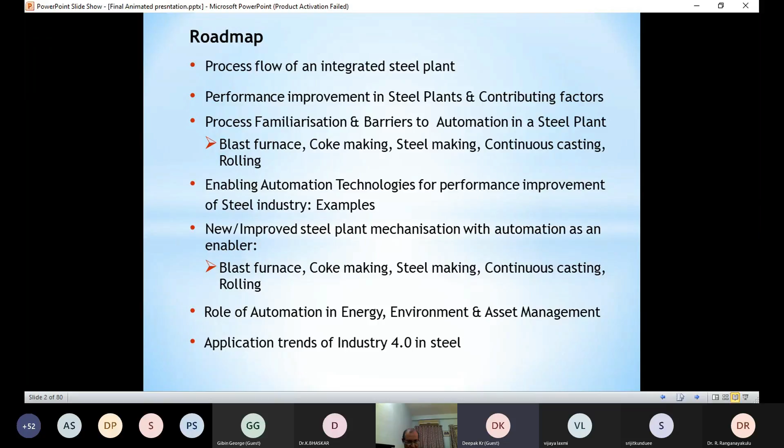Then enabling automation technologies for performance improvement of the steel industry - there will be 3 examples. The new and improved steel plant mechanization with automation as an enabler, how new technologies have changed automation and the affected process itself. Then again we will take the same examples of key processes: blast furnace, coke making. The role of automation in energy, environment, and asset management, and automation trends, Industry 4.0.

Iron was discovered in 2000 BC, and the first cast iron product was in 800-700 BC in China. Cast steel was first produced in India in 500 AD, but the technology was lost subsequently. The Iron Age started between 1500 to 1800 BC. This is a significant figure.

World annual steel production in 2020 was 1700 million tons, and this figure is more than all other metals put together. So steel is the majority if you talk about metal. China ranks #1 in the world with around 1000 million tons, and India produced 130 million tons in 2020.

Process flow of an integrated steel plant: if you look at an integrated steel plant from outside, the most important process where raw material is converted into liquid iron is the blast furnace. So the blast furnace is the most important process in any integrated steel plant.

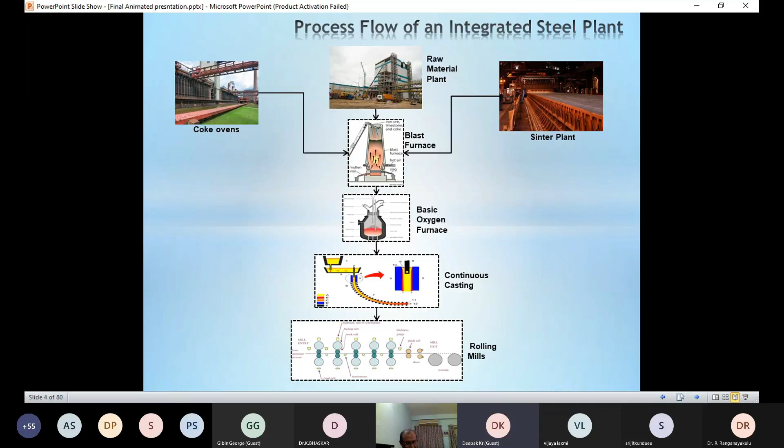These slabs, blooms, or billets, the output of continuous casting, are brought to rolling mills and hot rolled into various shapes. It can be flat or long, say rail or structural. After hot rolling, it can be sent to cold rolling for further thinning based on the application, and again processed into sheets, GP sheets, GC sheets, that kind of thing.

The steel plant process flow can be broadly divided into two categories: chemical processes, mainly blast furnace, coke making, primary steel making, secondary steel making; and physical processes that work on steel, that is continuous casting, rolling, and finishing. Here no chemical process is done, it is kind of shaping, rolling, and forming. Physical processes are visible and progress can be observed directly, and therefore may be controlled more easily.

Chemical processes - reactions take place inside a container under pressure, at high temperature, etc. Direct observation is not possible. Take, for example, the blast furnace - we depend on indirect observations, particularly the status of the output.

Processes up to steel making lag behind in terms of measurement of parameters and their controllability compared to, say, the rolling process. In the rolling process you can see things changing - the process is very much visible. Speed is very high, but you can control it. More precision is required.

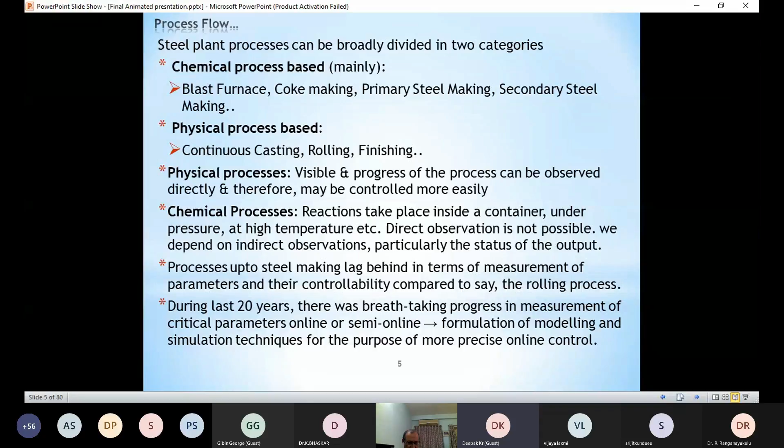During the last 20 years, there was breathtaking progress in measurement.

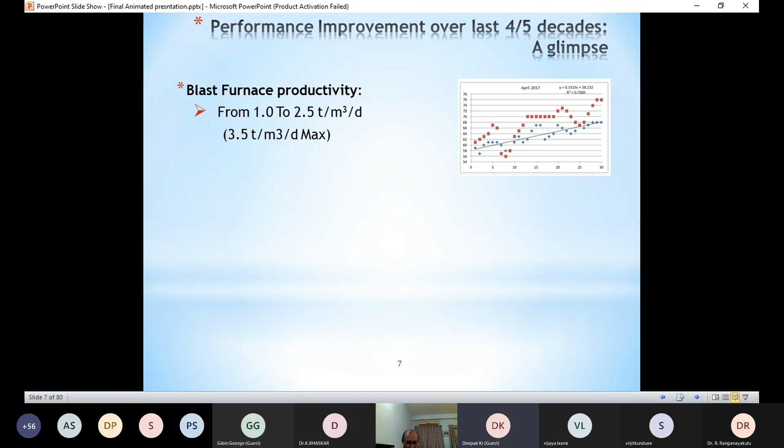Okay. The last line is being covered from that toolbar. I am not able to proceed. So there will be difficulty. No problem. If you go through...

If you go through the process improvement in the last 4-5 decades, blast furnace productivity went from 1 ton per meter cube per day to 2.5 tons per meter cube per day. This is the kind of productivity improvement that blast furnace has seen, and the maximum reported is 3.5 tons per meter cube per day. In India, it is normally 1 to 2.5.

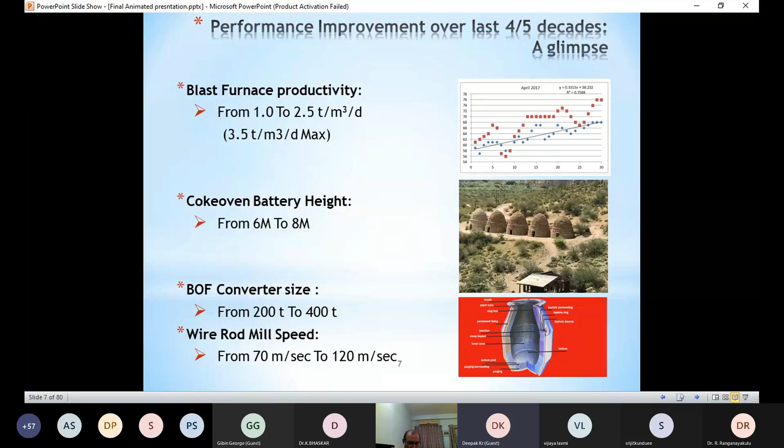Coke oven battery height went from 6 meters to 8 meters - this has gone up. BOF converter size, where liquid iron is converted to steel, has gone up from 200 tons to 400 tons. Wire rod mill speed has gone up from 70 meters per second to a huge 120 meters per second. Just think of a process where material is moving at 120 meters per second and you have to control it.

These are the contributing factors for performance improvement. It's not only electrical or automation, but there have been several breakthrough innovations in core technologies of steel production - metallurgical, mechanical (where rolling etc. comes into picture), electrical, chemical, civil, and allied.

But in particular, we have seen that electrical engineering and IT have contributed very significantly. Alongside that, developments in modeling and simulation of mechanical, chemical, and metallurgical processes have been unprecedented.

Innovations in mechanization and automation have leapfrogged mainly due to demands for better productivity, requirement of stringent quality, consistency, and high reliability. Automation and IT have ensured an enhanced level of process control without the involvement of operators. Because of automation, the number of people involved in the steel industry for making the same ton of steel has drastically gone down. As far as possible, processes are made semi-auto or auto, manless operator.

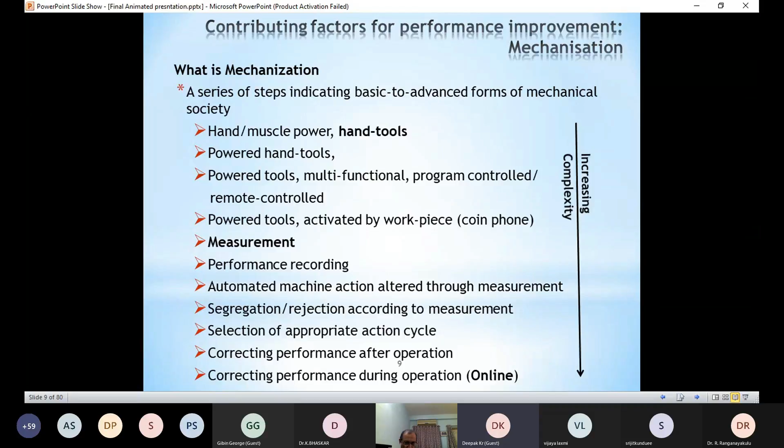What is mechanization? Mechanization is a series of steps indicating basic to advanced forms of a mechanical society. As we go from hand muscle power, hand tools, power hand tools, to power tools activated by workpiece measurement, then performance recording, automated machine action altered through measurement, segregation rejection according to measurement, and selection of appropriate action cycles, correcting performance during operation - as measurement and control take over, the complexity goes on increasing, but then control over process keeps on increasing. This is how mechanization has developed over time.

Use of machines, either wholly or in part, to replace human or animal labor is mechanization. Mechanization requires human participation to provide information or instruction. After 1900, factories were electrified and electric motors and controls were used to perform more complicated mechanical operations. This resulted in proliferation of mechanized processes to manufacture almost all goods.

In terms of efficiency, you can see for labourers it is 1 to 5.5%, whereas for IC engines it is 20% to 50%, and for electric motors it is above 90%.

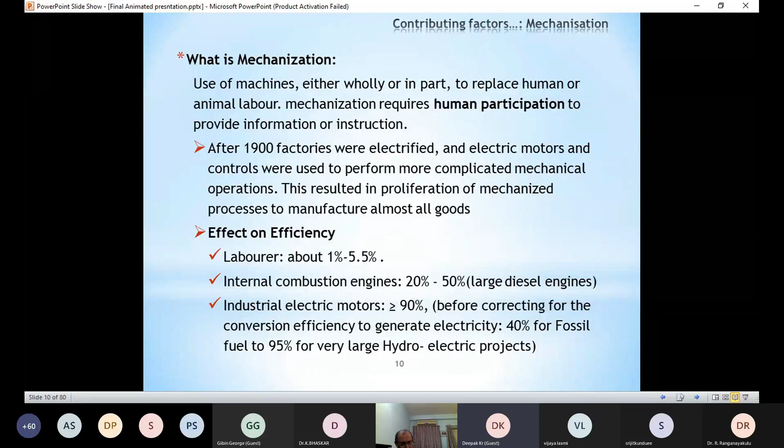What is automation? A wide range of technologies that reduce human intervention in a process. Automation has been achieved by various means, including mechanical, hydraulic, pneumatic, electrical, electronic devices, and computers. The paradox of automation is that the more efficient the automated system, the more significant is the human contribution.

Different types of traditional automation tools that we use are single loop controllers, PCS, PLC, instrumentation, motion control devices, DCS, HMI, and recently, not very recently but from quite a long time, AI, ANN, and RPA. A new field which is a subset of AI, cognitive automation, is an emerging field, and we hope that Industry 5.0 will be based on this only.

Automation of clerical tasks and workflows relies on natural language processing, real-time computing, machine learning, big data analytics, and evidence-based learning. The term automation has come into wide use since 1947, when Ford Motors established an automation department.

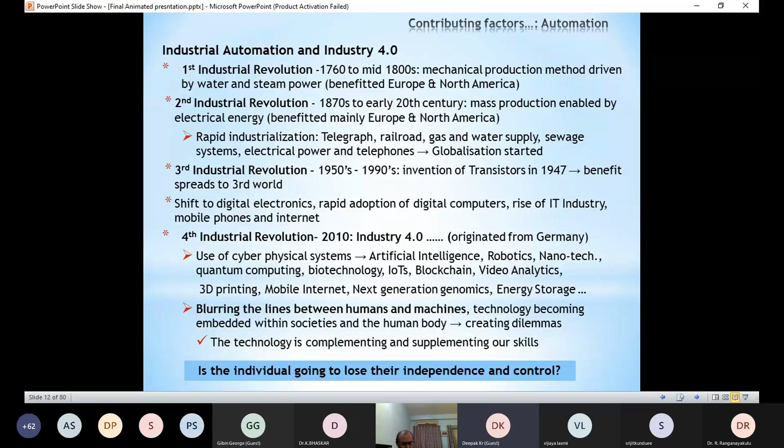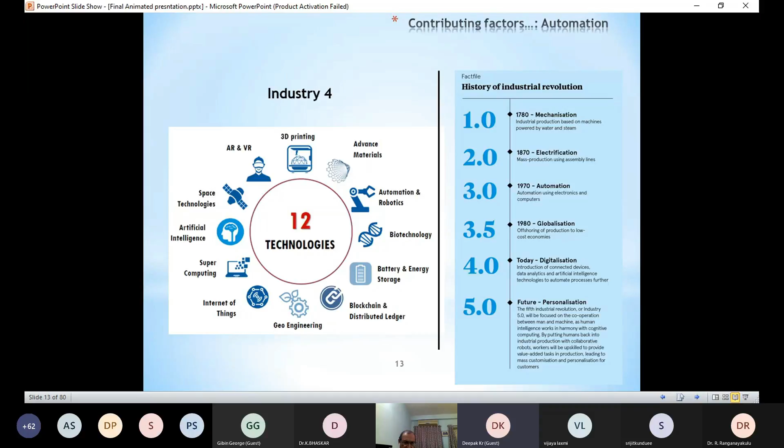This slide shows main technologies of Industry 4.0: 3D printing, AR and VR, space technology, artificial intelligence, supercomputing, Internet of Things, blockchain, and distributed ledger. Recently, Tata Steel has done something on blockchain with HSBC.

Now, process familiarization and barriers to automation in steel plants. So why is automation so difficult in a steel plant? We will take examples one by one.

There are many black box processes. The process cannot be visualized by human senses, if visible only from a distance. Automation equipment is exposed to high temperature. General ambient temperature is 5 to 10 degrees centigrade higher than the normal environment temperature, and it is dusty, so reliable operation is an issue. Equipment outside the control room requires mechanical protection against ingress of foreign material and vapor, so we have to see IP ratings for all automation elements that we employ.

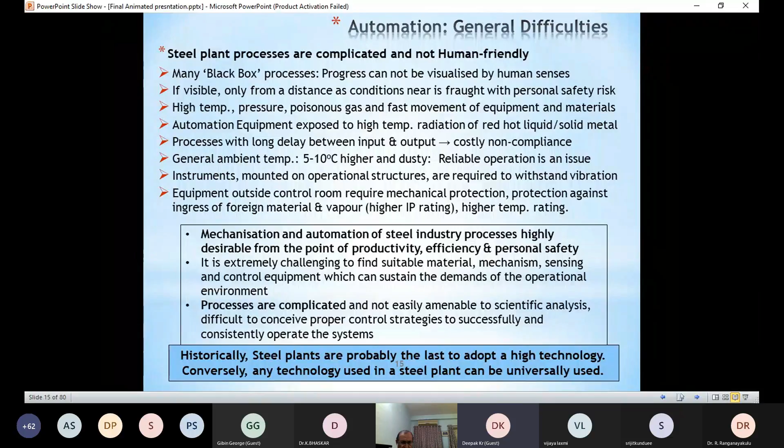Next, sir. Talking about blast furnace, as I said, the inputs are iron ore and sinter plant. It is about 60 meters tall, and the output is hot metal, also called pig iron. Here carbon is about 4%, and this requires extensive infrastructure, because in blast furnace we have several inputs, and all those are big plants.

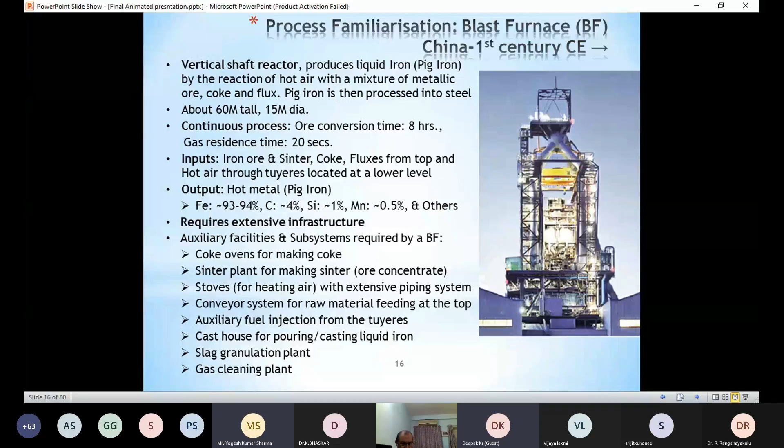Coke ovens for making coke, sinter plant for making sinter, stoves that are used for heating air and fed to blast furnace from down below, conveyor systems for raw material handling, gas cleaning plant, etc.

So it's a multivariate process subject to inter-influencing variables. Complex chemical reactions take place at high temperature, around 2300 centigrade, and pressure 1.5 to 2.5 atmosphere, progressing both vertically downwards and radially outwards at different levels differently.

So there are several parameters that need to be monitored for proper, efficient functioning of the blast furnace: temperature and pressure distribution vertically, temperature and pressure distribution radially, burden height, etc. The challenges are reliable sensors and instruments to operate in such hostile ambient conditions. Proper installation and maintenance are key.

Next, sir. Another input to blast furnace is coke oven, a product from coke oven, that is carbonized coal. This is a thermal distillation process. Coking coal is heated above 600 degrees centigrade in the absence of oxygen, and the volatile components evaporate, leaving behind hydrocarbons. So coke oven gas is used as a fuel in downstream steel making process.

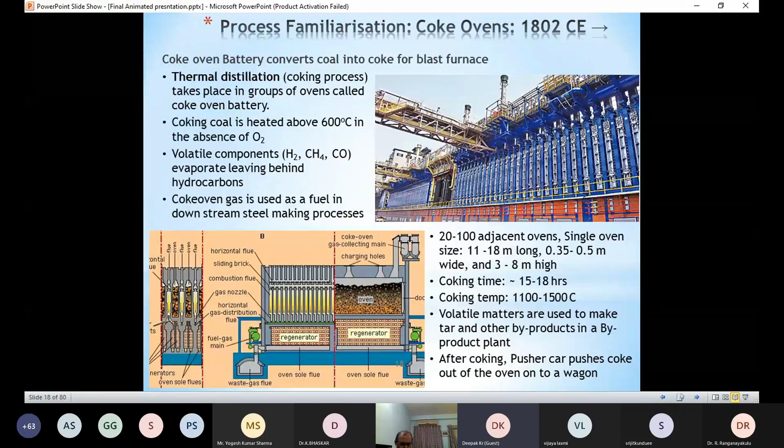So you can think of the kind of operation and infrastructure that is required here, and proportionally we need rugged automation systems.

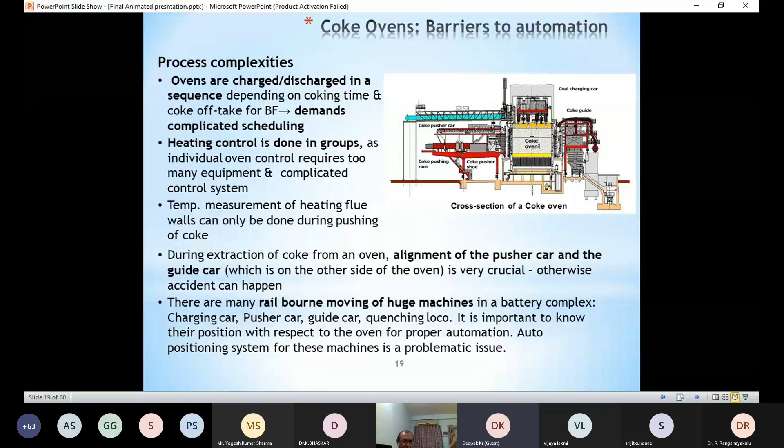Now what are the barriers? Ovens are charged and discharged in a sequence depending on coking time and coke offtake for blast furnace. This demands complicated scheduling for when you will charge and when you will take out, so that there is no deficiency of material in blast furnace.

Heating control is done in groups. Temperature measurement of heating flue walls can only be done during pushing of coke, but you have to monitor the process continuously. During extraction of coke from an oven, alignment of the pusher car and the guide car is needed—when you are pushing, the guide car on the other side of the oven has to be aligned. So you have to have some automation alignment system for this.

There are so many complex operations in this hostile environment, and automation along with alignment, scheduling, and proper instrumentation for heat and pressure should work 24/7.

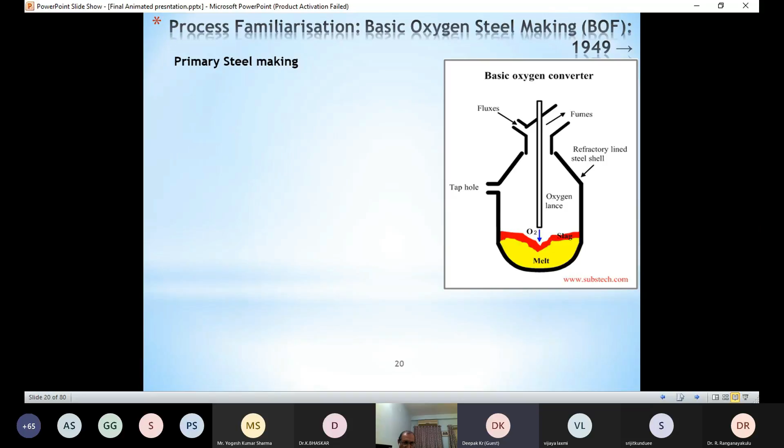The next process is primary steel making, where iron is converted into steel. Carbon-rich molten iron is made into steel by blowing oxygen through a lance at supersonic speed. The converter vessel is then tilted to tap low carbon steel into a ladle for secondary processing.

This further fine-tunes the chemistry. The BOF process eliminated the very long duration open hearth process. Now the converter takes a charge of up to 400 tons and completes the process in 40 minutes. This used to take 10 to 12 hours in an open hearth furnace, but that open hearth technology is quite old now.

There is combined blowing here, oxygen blown from the top and inert gas from the bottom. This requires a special facility.

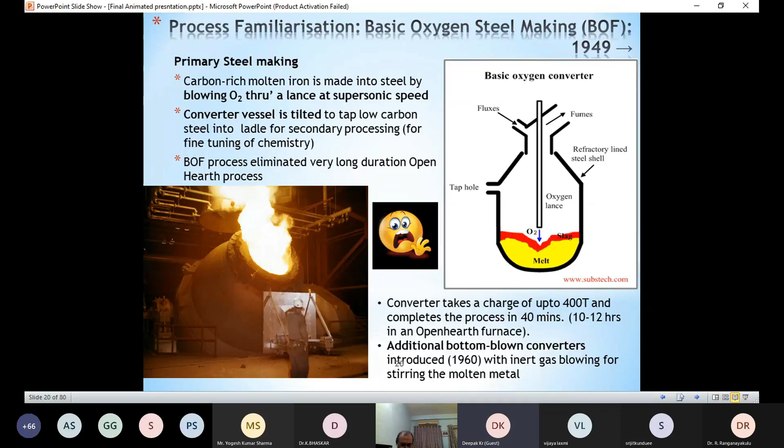There are more than 3,500 different grades of steel for various applications, based on chemistry, physical properties, etc. The purpose of secondary steel making is to produce better quality, various grades of steel.

Deoxidation is done, which is removal of oxygen by a killing process. Alloying is where you add alloying elements to obtain diverse properties. Then there is microcleanness, removal of non-metallic inclusions to improve the microstructure of the steel. This secondary steel making process comes after primary steel making, and it is meant to improve quality and make various grades.

This is a very precise process where vacuum is created in a ladle furnace, and oxygen removal and other difficult processes are done to further clean the steel or make newer grades. This requires huge automation systems and precise electronic automation systems.

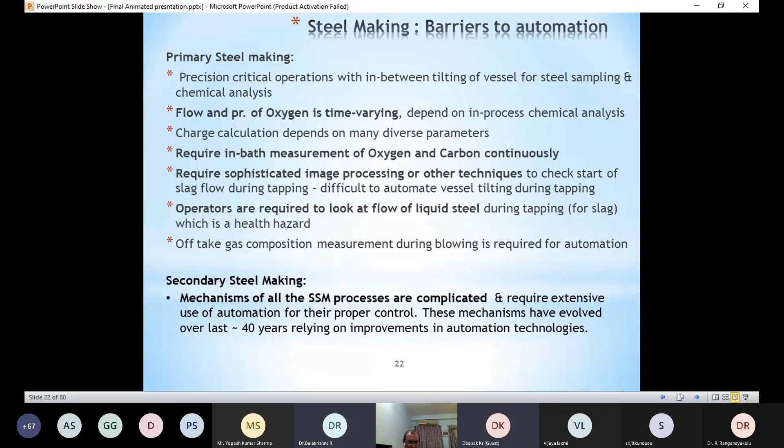Offtake gas composition measurement during blowing is required for automation. It's almost the same for secondary steel making, but more precise.

Now, continuous casting. In this process, molten steel is solidified while moving into billet, bloom, or slab form, which has totally eliminated the process of ingot casting. Earlier there used to be ingot casting from molten steel.

Now it is solidified in a continuous caster directly into billets, bloom, or slab. Molten steel flows from the ladle to the tundish to the water-cooled mold. The molten steel solidifies against the water-cooled copper mold walls to form a solid shell. Drive rolls continuously withdraw the shell from the mold. Below the mold exit, the solidifying steel shell acts as a container to support the remaining liquid steel.

The liquid steel, as you can see in the figure, comes down to almost a horizontal level. The solidified strand is torch cut into slabs, blooms, and billets. This is done online. This is a typical slab caster with a casting speed of 1.4 meters per minute.

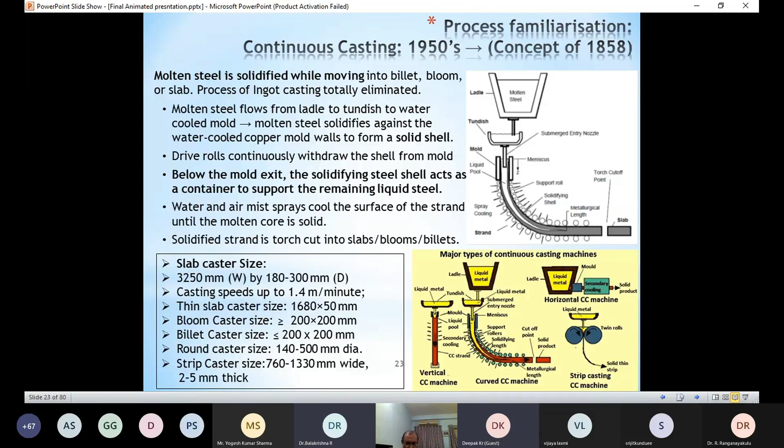There are several types of caster machines.

Now, barriers to automation for this continuous caster. Initially it was not that demanding, but modern casting machines can produce a wide variety of shapes and cross sections with automation. The tundish is the second component from the top, shown in yellow.

Continuous temperature measurement requires special refractory-coated probes, which are dipped inside hot metal at 1600 degrees centigrade. So you have to take the temperature of hot metal at 1600 degrees centigrade, and that too continuously.

Dissolved hydrogen and O2 concentration measurement in liquid steel is needed. Hot metal level measurement is very complex, so we employ electromagnetic level measurement. Then there is flux thickness measurement, which is again a very complicated thing.

Mold level measurement used to be an area of concern, but now we have radioactive level measurement systems. Liquid steel flow estimation was not possible earlier; now we have ultrasound Doppler velocimetry.

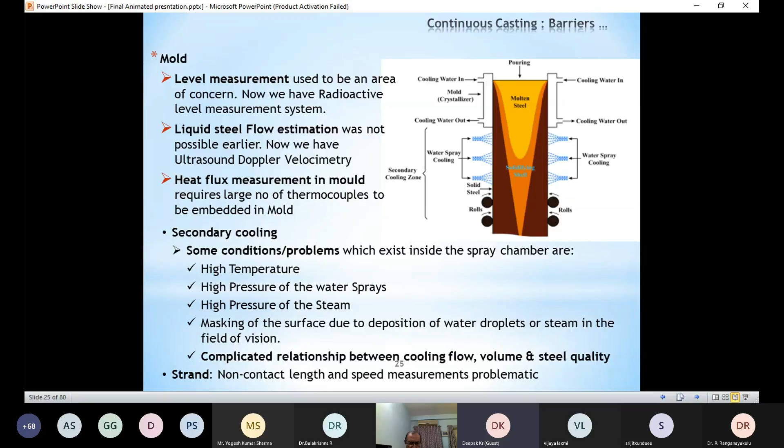Talking about rolling after continuous casting, when it takes a shape - bloom, billet, or slab - it is brought to rolling. The invention of rolling dates back to drawings of Leonardo da Vinci, as you can see in the figure. This is a metal deformation process where the material is pressed between two oppositely rotating rollers to reduce thickness. The roll stand holds the pairs of rolls together, so there is a rolling stand in between. For simplicity, there is a pair of rolls - thick metal comes in, and thinner metal goes out after rolling.

There are two kinds of rolling: hot rolling and cold rolling. Hot rolling temperature is above recrystallization temperature. This produces more tonnage than any other manufacturing process. The main products of hot rolling are shapes, bars, rods, rails, sections, flat, hot strip, and skelp.

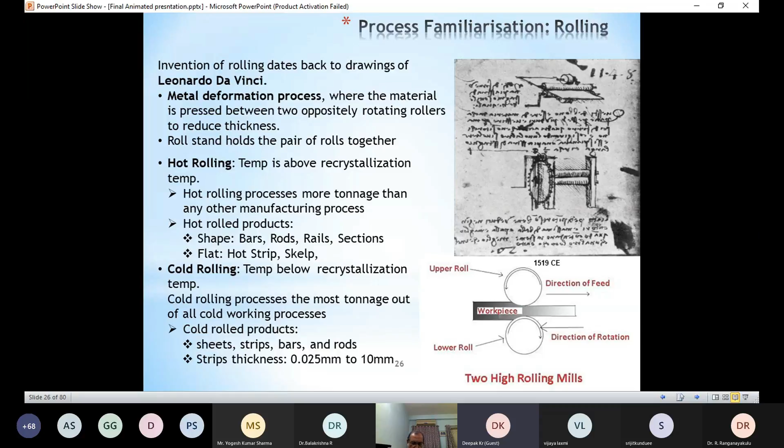Cold rolling temperature is below recrystallization temperature, so it is normally at environment temperature only. Cold rolling processes the most tonnage out of all cold working processes. Cold rolling products are mainly strips and sheets, with thickness as low as 0.025 mm as the minimum.

The hot rolling process is visible but extremely fast. The slab or bloom is first brought to a reheating furnace, where it is heated and soaked, then brought to hot rolling mills which have several stands - you can see 1, 2, 3, 4, 5 stands here. Each stand reduces it by some percentage.

Since the material is at very high temperature, say above 1100 degrees centigrade, the process is visible but extremely fast. The environment is hostile - temperature is high, there is a lot of vapor, dust, and EMI. The inter-stand space is very small, but many sensors are required to be placed there. Instruments mostly require massive protection and cooling, and must be protected against accidental contact with rolled material during operation.

Installations must account for moving of heavy equipment by cranes, and maintenance space for production systems. Cabling and cooling arrangements at the shop floor pose severe challenges. Sensor and actuator accuracy and repeatability are very highly important.

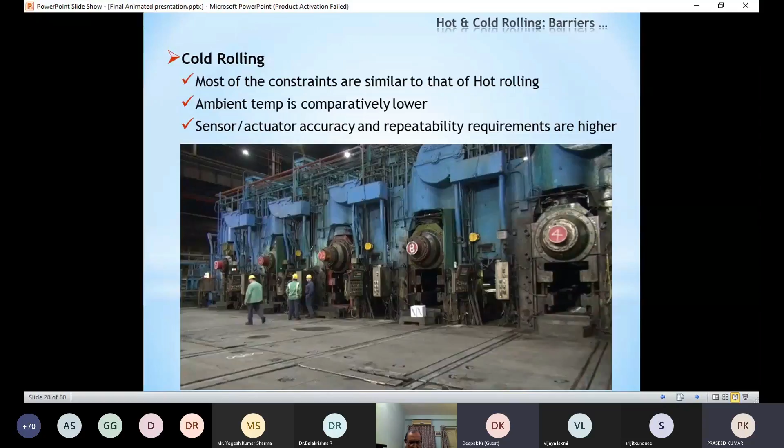The difficulties in rolling mill measurement involve several things to be measured: in motors, the torque, interstand tension, roll force, strip thickness, shape, width, edge position. In the reheat furnace, you have to measure and control temperature, pressure, flue gas composition, progress of heating, coil position on the roll table so it is tracked properly, and entry and exit temperatures are maintained.

The main controls available in rolling mills include automatic gauge and width control, hydraulic gap control, crown and profile control, crop optimization, and thermomechanical rolling.

There are several areas that need modeling and simulation in rolling mills: reheat furnace control, prediction of strip temperature - especially exit temperature, which is extremely important - roll wear prediction for finishing stands of hot strip mill, accelerated cooling of strip, since cooling matters a lot for properties, and crop optimization so that wastage is minimum.

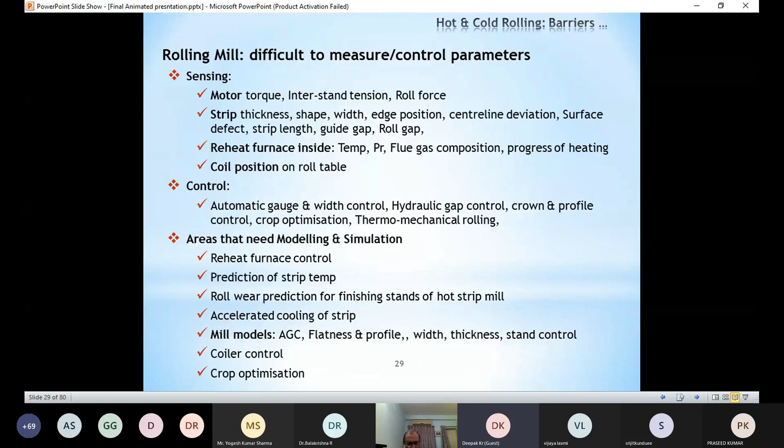Enabling automation technologies for performance improvement of the steel industry: the traditional automation system implies a hierarchical control system, with sensors and actuators at the bottom level, then controllers, motors, PLC controllers, DCS, single loop controllers, along with SCADA and HMI. Above that comes simulation and modeling, and even at the top of it, IT, and now digitalization and business process automation.

So the traditional elements of automation - sensors, controllers, fieldworks, SCADA, HMI, simulation modeling - now have new components: smart and new generation sensors and actuators, robotics, big data, manufacturing analytics, AI, cloud technology, AR and VR. These new things are making it exciting and offering a lot of opportunity.

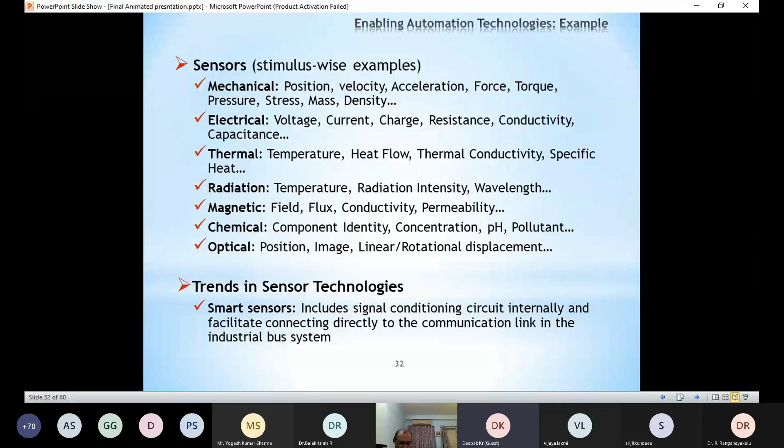Now sensors are changing a lot. The new generation of sensors are smart sensors that have signal conditioning circuitry internally and can actually have a communication link, and more sensors are being brought to the communication link.

Sensors with advanced technologies: piezoelectric transducers can be used to measure force, acceleration, pressure, and many other parameters. Proximity switches, tactile sensors, ultrasonic sensors, capacitive sensors. Some samples of specific sensors.

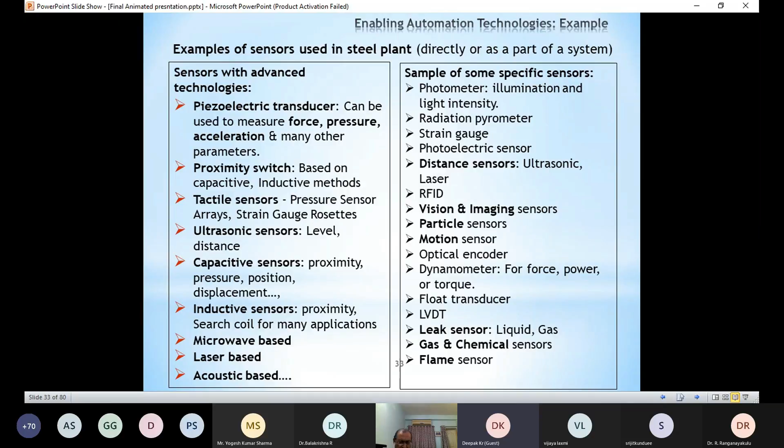Photometer, radiation pyrometer, strain gauges, photoelectric sensors, distance sensors, vision and imaging sensors, particle sensors, motion sensors. So there are several types of sensors directly being used in steel plants.

Now the trends in sensor technologies are mostly miniaturization. These have to be less power consuming, improved performance, multiple sensors with small footprints, digitalization - that is intelligence to interpret data - IoT capability, sensor fusion.

Now several sensors are being fused into one, for example pressure and temperature sensing. Tri-quad sensors is the trend, IoT compatibility, wireless connectivity. The growth areas for new sensor technologies are pressure, force, temperature, spectroscopy, acoustic - lab-based systems are going online.

Actuators are devices that operate something linear or rotary. So energy for movement comes from manual, mechanical, electrical, hydraulic, or pneumatic sources. New types of actuators have come into picture: thermal and magnetic actuators.

Shape memory alloys - in thermal type, heat produces movement. In magnetic types, field produces movement. There is a wide and powerful range of motions, and these are lightweight.

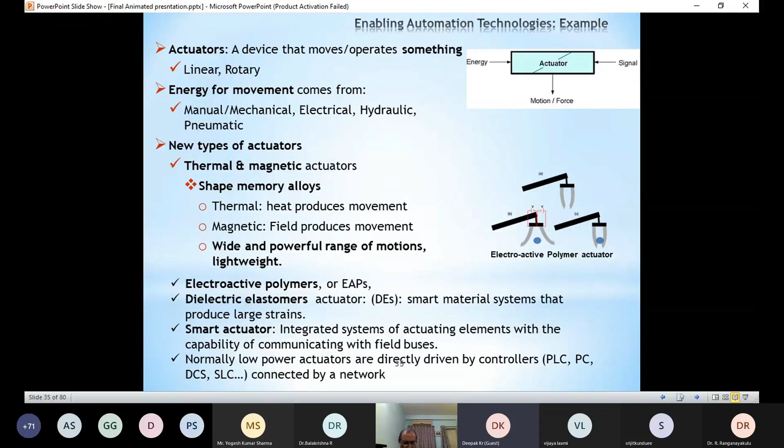Pneumatic actuators and hydraulic actuators are used a lot in the steel industry. Pneumatic actuators are essential for fire or ignition hazard applications.

These are better suited for higher force applications. Pneumatic diaphragm actuator, piston actuator, pneumatic rack and pinion actuator - various types. Hydraulics are mainly used for bending, lifting, pressing, and moving. These are for harsh operating environments, and these actuators are quite precise.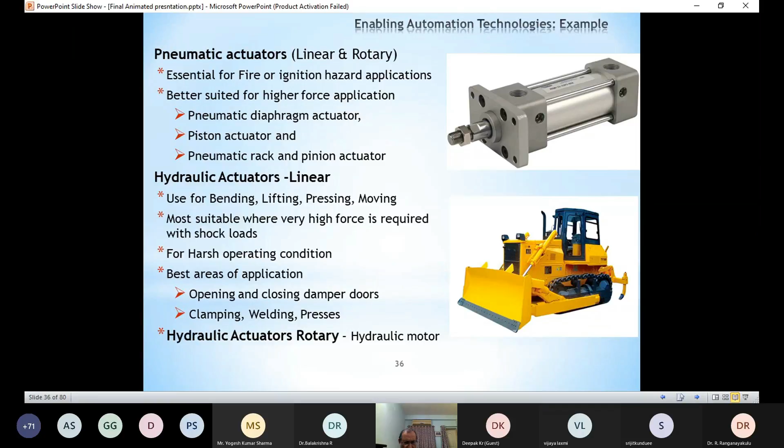Controllers, as we know, are the basic requirement for any control system. Single loop controllers, PLCs - there are several types of PLCs: small, compact for small applications where I/O requirement is less; modular PLCs that have a common bus and the I/O capabilities can be extensive, mid-size, or large size. So there are several types of PLCs based on application we select.

Now where is PLC going? PLC is going towards DCS, and DCS is going towards PLC. So there is merging of functionalities. The microcontroller is programmed, and more features are added. So merging of PLC and programmable automation controller functionality is the new trend.

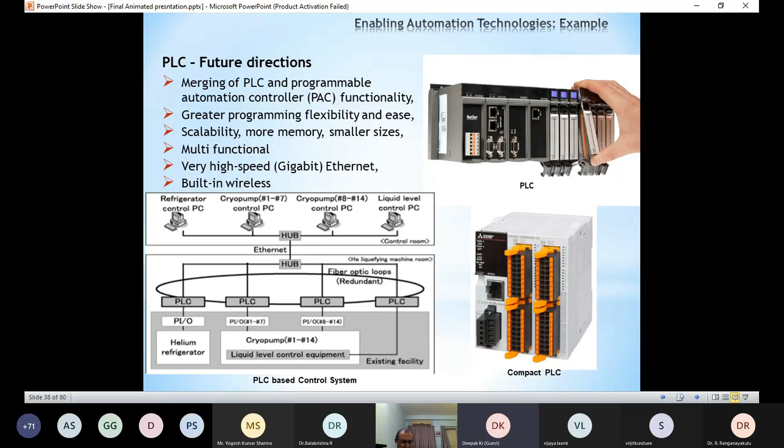There is greater programming flexibility and ease, scalability, more memory, smaller sizes, multifunctional, very high speed Ethernet, built-in wireless, web module. There are so many things - all the features that were available in any DCS controller are being brought to the PLC as advanced PLC or in some other name.

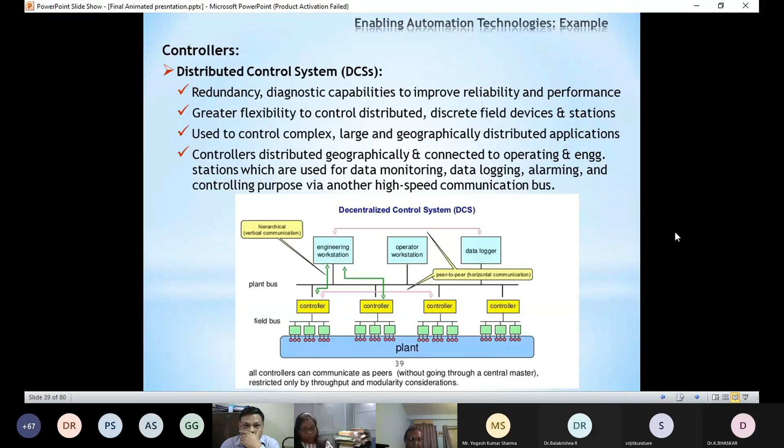I am not going into the details of DCS, it is too complicated to go into detail, but a general question comes up between PLC and DCS. Many of us, including automation engineers, are confused about whether to use a PLC or DCS - this is a common problem. So this is a simple comparison. It does not tell you what to use, but it tells you some comparison between PLC and DCS.

Application-wise, PLC is generally for dedicated applications, whereas DCS is for complex processes. Architecture-wise, PLC is simple and flexible. Speed of response for PLC is higher, as it is dedicated for a process, whereas DCS is much slower comparatively. Scan time for PLC is low. Control for PLC is for specific machines, whereas DCS is normally for a plant.

IOs are, let us say, to the tune of 1,000 numbers in PLC, whereas in DCS it would go into several thousand IOs. Controller type for PLC is centralized, whereas in DCS it is decentralized. Human interaction required is minimum in PLC, but in DCS we require comparatively more interaction because it is a diverse process. Flexibility-wise, PLC is less flexible. Programming-wise, PLC is freely programmable, whereas DCS has built-in control functions to be configured - once configured, it is easy to use. Redundancy-wise, additional hardware is required for PLC to bring in redundancy, whereas for DCS it is a default feature. Cost-wise, PLC is less.

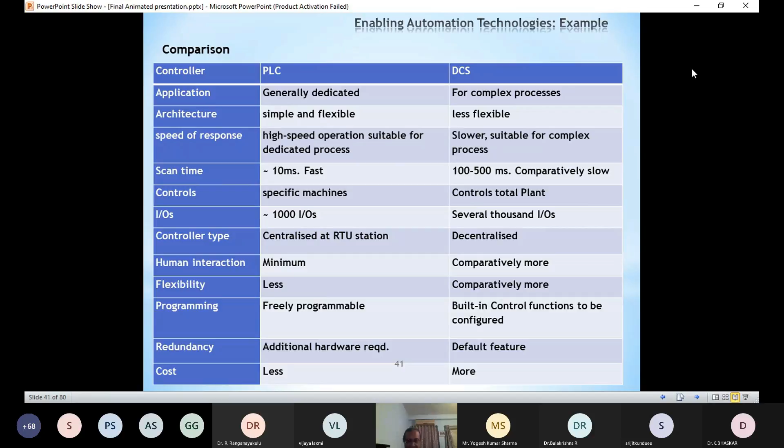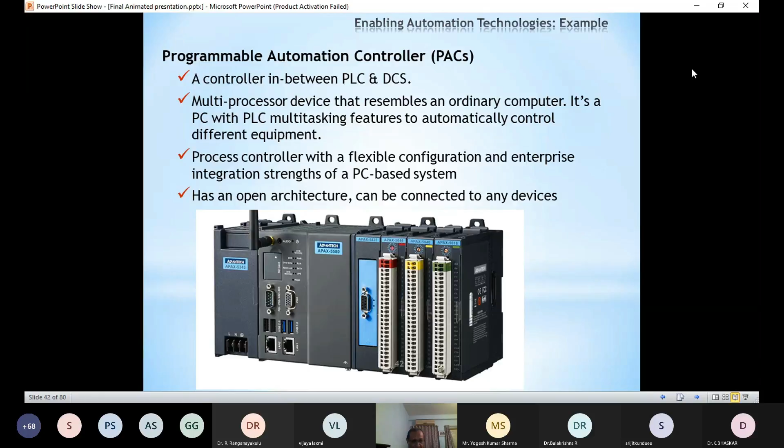Now, this is the programmable automation controller. You can say it is a controller in between PLC and DCS, or between PLC and PC - programmable or personal computer, whatever industrial grade personal computer. It is basically come up to do the job of both PLC and DCS, by some vendors. It basically resembles an ordinary computer. It has multitasking features, a flexible configuration, and an open architecture.

The term supervisory control and data acquisition, SCADA, is very widely used. This is a generic name, not an equipment. Supervisory control and data acquisition can basically be attained by many devices. Particularly, this term is used for processes which are spread over a very long distance, like transmission, power and distribution, transmission and distribution pipelines, power transmission. Then there are very geographically distributed processes where the data link is basically a shared data link, for example microwave, satellite, phone lines. These are the places where the term SCADA is generally used.

Now, let me come down to enabling automation technologies for performance improvement of steel plants. What I mean is those technologies which have enabled performance improvement in steel plants, but they are not specific to steel plants - they are used everywhere.

To start with, let us say modeling and simulation - this is a continuation, sorry, Deepak started, I forgot the overall title. Modeling and simulation is very, very important for any process today. For steel plants, earlier it was difficult to do, but now it is possible because of access to information inside a process. This is basically designing any conceptual system, conducting some experiment on the conceptual system, understanding the performance of the system, and then evaluating alternative management strategies and decision making to get the final results.

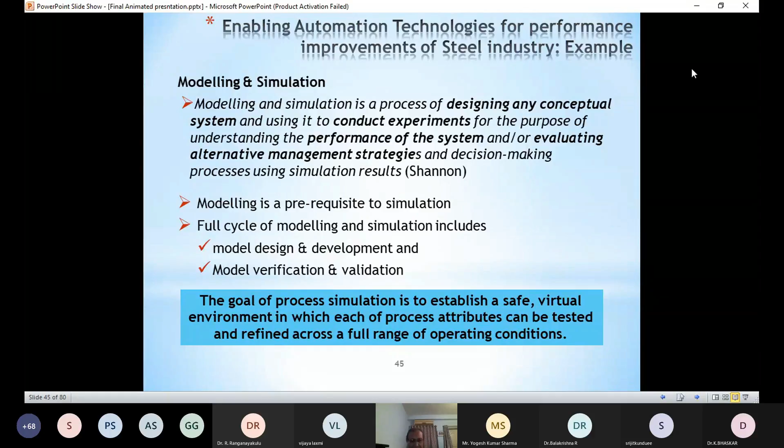Modeling is a prerequisite to simulation, and full cycle modeling includes model design and development, and then model verification and validation. The goal of process simulation is basically to establish a safe virtual environment in which each process attribute can be tested and refined across a full range of operating conditions without going into the actual operation. So it is basically safe - we are playing safe and trying to understand the dynamics of the process.

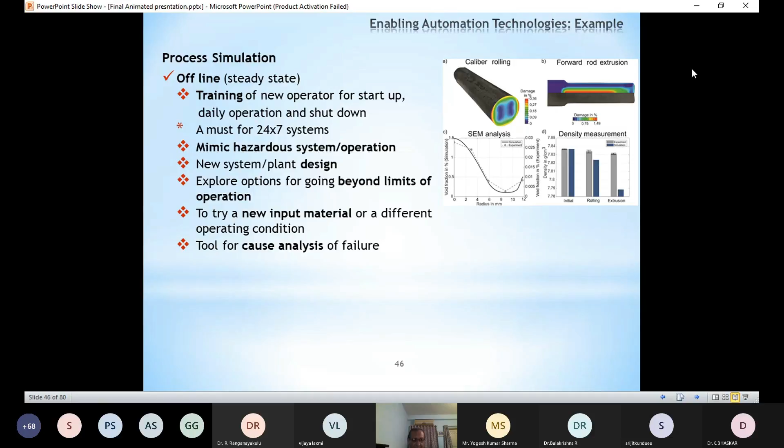Now, in process simulation, offline simulation has several purposes. Training is one of them - operator training. Then mimicking hazardous system operation is a very important requirement for process simulation. It is also used for system design, for exploring beyond-limit operation of any plant, and if you are changing raw material, offline simulation is an excellent tool to understand how the system will behave. It is also used for failure cause analysis.

Whereas real-time dynamic modeling and simulation runs along with the plant, it monitors and optimizes the plant performance continuously. It tracks performance, optimizes production, and improves plant controllability.

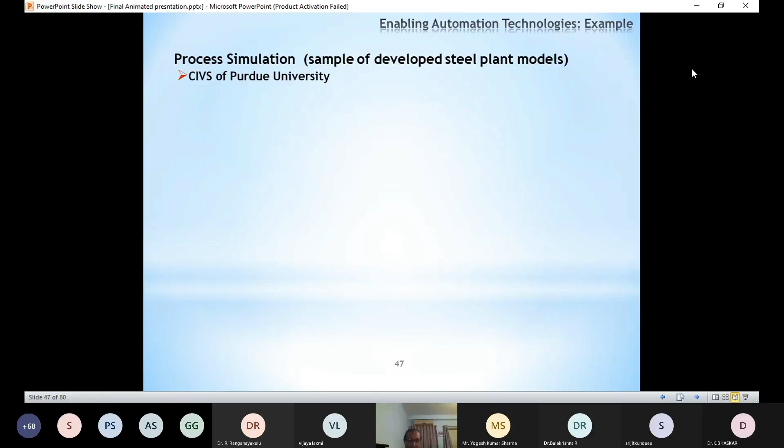Now, for steel plant modeling and simulation, there are many organizations all over the world who have mastered the various kinds of technologies. Purdue University for a very long period has been working on modeling and simulation for steel plants in particular. You can see this is a partial list, not a full list, of various models they have developed over a period of time.

Many of these models deal with blast furnace, which I consider the most difficult process among all steel making processes. They have used computerized fluid flow models in many places. They have also done modeling for training purposes, including safety training and operator training, and modeling for steel processes other than blast furnace. They have done finite element analysis as well, and many models are based on that.

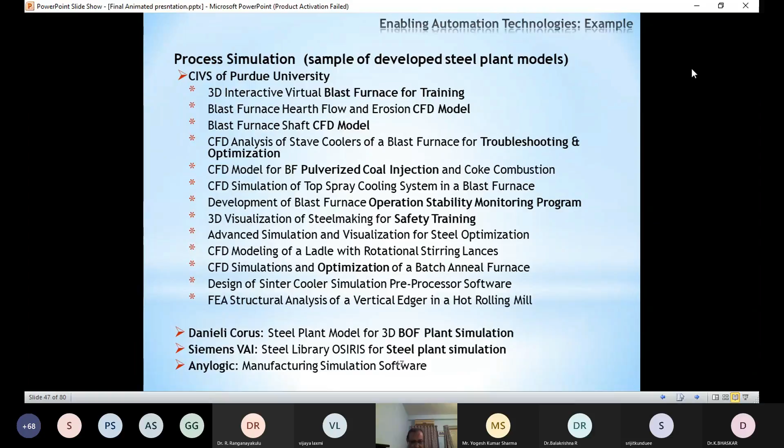There are companies like Danieli Corus, Siemens VAI, Anylogic, SMS, and ABB. There are many companies in the business of steel plant modeling and simulation, and here is a small list of them.

Modeling has two types of approach. One is called agent based simulation and modeling, ABS. This is a bottom up modeling architecture that focuses on modeling individual agents. It is a decentralized simulation architecture, and model inputs are often based on theories and subjective data, with the overall system response emerging from micro level relationships.

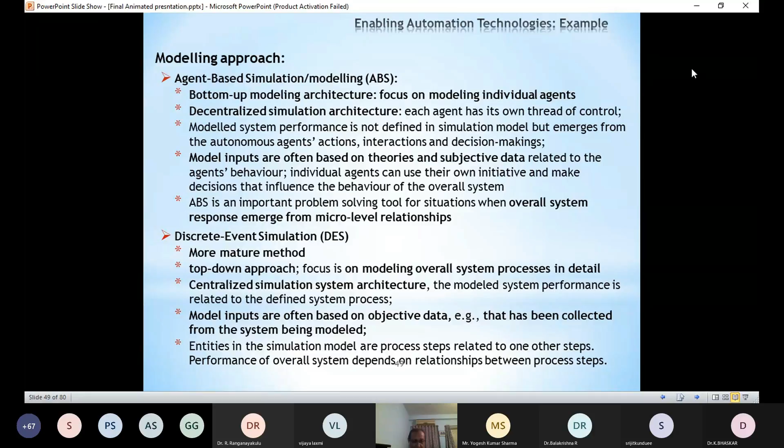The modeling procedure is this: we start with a problem statement and objectives, then do system analysis, model building, and coding. Then comes verification and validation. After that, we go for production runs and statistical analysis of data, and at the end, implementation.

Of these, verification and validation is the most important, which can be done in four ways. One is self-validation, where the model development team itself makes the decision about validity. Co-validation is where the validation process is integrated within the model development process itself. Independent validation is done by an independent third party, and scoring validation uses a scoring model for deciding the validity of the model.

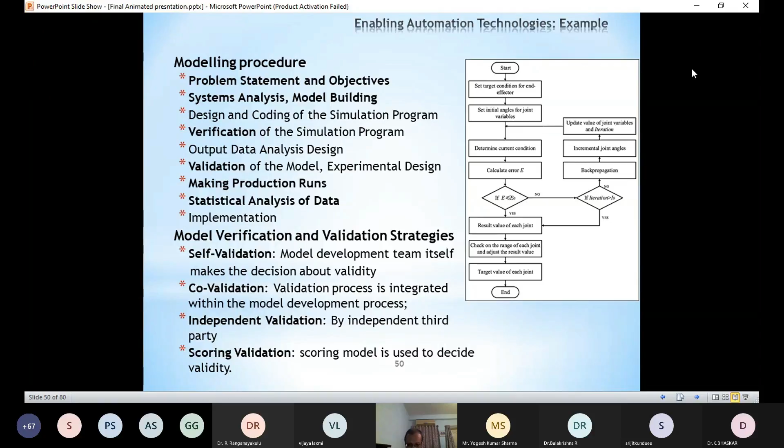Application of advanced automation technologies in basic manufacturing processes is a very recent trend in steel plants. Earlier, for example, we had instruments, but they were not smart, so we had to use a lot of additional equipment to understand their readings, modify them, and communicate them in physical terms. We now use smart instruments, which are integrated systems of sensing or actuation with communication facility and internal processing, including scaling and other functions done internally.

Signal conditioning circuits are also included. Human machine interface is a graphical representation of the process where an operator can sit and interact with system processes through input and output. They can control any process sitting in a room. You can see the screen of a DCS system in the right bottom corner.

Advances in robotics have many applications in steel plants, particularly in hazardous areas, and steel plants are full of hazardous areas. In fact, I would find very little place if I looked for a safe area in a steel plant.

AI, artificial intelligence and machine learning is picking up. These are new age automation tools, and they are being used in steel plants, not widely. It has been used by many steel plants in many applications, but not very widely as yet.

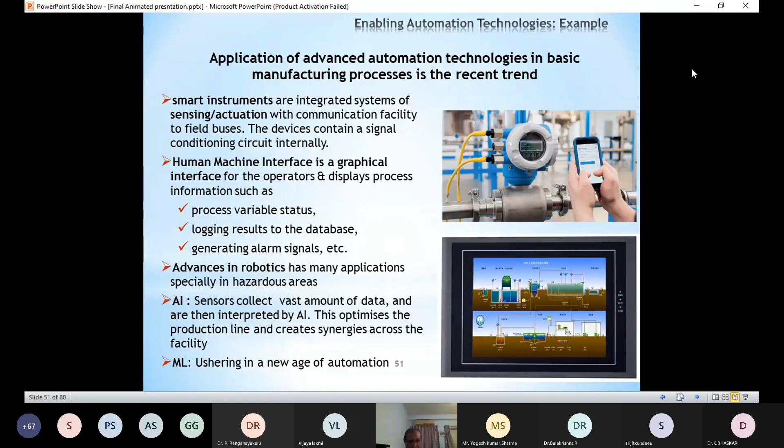IIoT, Industrial Internet of Things, is again a new enabler, automation enabler for steel plants. In real time, IIoT helps to adapt and change the overall operations. It generates a faster response in terms of actions. Decision making is faster by top management or any level of management for taking various decisions about the process in terms of business decisions, and it has great potential for quality control, supply chain traceability, etc.

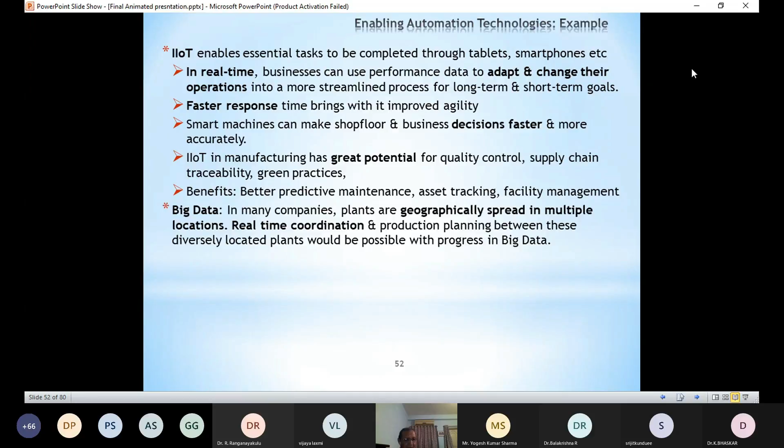Big data is an area which is very useful for steel plants. Steel plants are geographically spread in multiple locations. Like Steel Authority has about 10 plants spread all over India. Now, we are unable to coordinate on a day-to-day basis, frankly. After a few days we look at who has produced what, and then various decisions are taken. It is basically because the data transfer is not very fast. Big data and their analysis can lead to real-time coordination of various production processes, production planning processes, which are spread over a long geographical distance.

Robotic process automation is a very new tool where software is used basically to create and deploy software robots. I am not yet aware of any specific location in India where it is used, but I understand this is being used in various other plants all over the world, many places, advanced places.

Now, Industry 4.0, these are all Industry 4.0 tools. Industry 4.0 at the end for steel plant means autonomous steel work, as people, product and production facilities are fully connected through IIoT.

Now, let us see safety and cyber security in the steel industry. These are very important issues as such. Safety—if you ask anybody who works in a steel plant about safety, he will immediately say steel plants are basically unsafe. That is very true. But then over the last 30 to 40 years, the safety records of all steel plants, including Indian steel plants, have improved dramatically, mainly because of the contribution of automation.

What has automation done there? Automation has made systems which limit the approach of operating personnel to hazardous work. Automatic sampling, automatic measurements instead of manual measurement, has reduced the need for a worker to go near the process. And if I do not go near the process, definitely I am avoiding danger and increasing safety. Designers have also used various tools to design more safe systems.

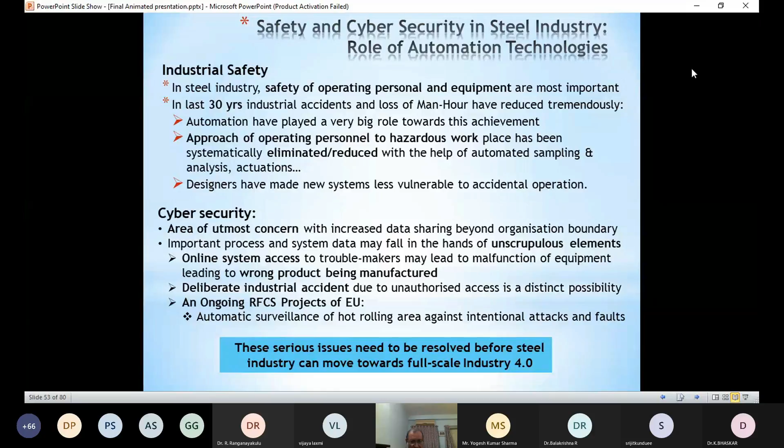In fact, this has happened in Iran, not in a steel plant, but in a nuclear plant, where America deliberately sabotaged part of the plant using this method. There is an ongoing project in Europe where they are doing automatic surveillance of the hot rolling area in a steel plant against intentional attack and fault. So these issues require a solution before we can say Industry 4.0 can be fully utilized in a steel plant.

Now, this is an interesting bit of information in terms of cyber hacking. This occurred in 1903, more than 100 years back, when Marconi, the radio pioneer, wanted to show how Morse code can transfer information over a long distance safely. He wanted to transfer a Morse code based signal from London to a place 300 miles away. At the receiving place, there is a brass projection lantern which is supposed to go on and off as per the Morse code.

Before the actual demonstration started, the lamp started blinking, and the operator realized that this is doing something different than what the actual Morse code message was supposed to be. The message that came out read: 'rats, rats, rats. There was a young fellow of Italy who diddled the public quite prettily.' Marconi was an Italian. This was done basically by a magician called Neville Maskelyne, based in the UK, who wanted to show the vulnerability of the whole process.

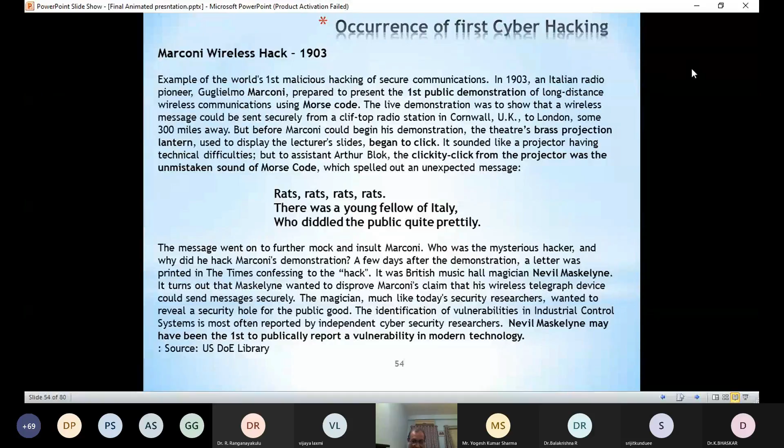So you can say he is one of the modern—nowadays we have various cyber security researchers—he is one of the pioneers in that field.

Now let me go to improved steel plant processes. What are the processes that are now in operation? Many of them, which could not have happened without automation being incorporated there.

Let's come to blast furnace. In blast furnace, we now have bell-less top, which is a quantum jump in blast furnace technology, with a complicated mechanism involving automation. Today we have 6,000 cubic meter blast furnaces, about 100 meters tall. This huge size blast furnace cannot be operated stably without automation, because with such huge volume, the stability of blast furnace operation is very important, and it is not humanly possible to look into thousands of parameters and then come to a conclusion about the operation. This is quite well operated nowadays.

Auxiliary fuel injection is another very interesting area. In blast furnace, we inject all sorts of things like coal dust, natural gas, fuel oil, oxygen, plastics, hydrogen - you name it - and it can be injected in blast furnace, and iron can be produced. How is it possible? It is possible because of advanced thermodynamics and modeling, which are the boon of automation technology.

In blast furnace, we insert rugged, reliable probes routinely. These probes are rugged and don't require maintenance. They go inside and measure basically temperature and pressure distribution inside the blast furnace, which is very important all along the height and radially also. With all this data available, expert operators initially used to decipher that data. Now we have developed modeling and simulation techniques to understand those data.

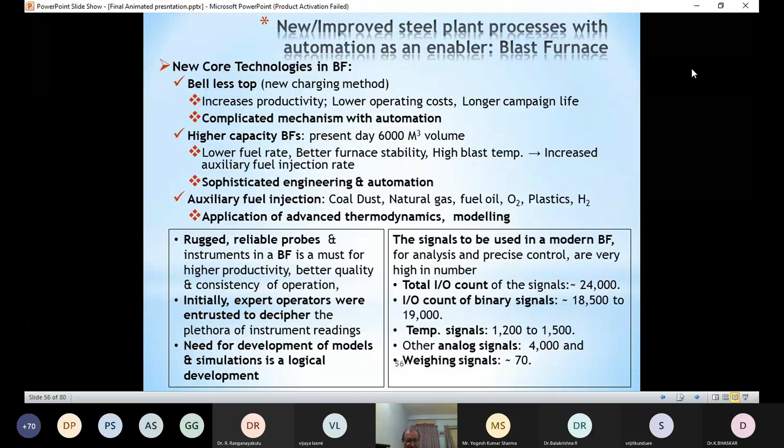To give an understanding of the extent blast furnace is automation infested, let me use that word - we have around 24,000 IO counts of signals in a blast furnace. Binary signals are of the order of 18,000 to 19,000. Temperature signals in a blast furnace are roughly 1,200 to 1,500. Other analog signals are roughly about 4,000, and weighing signals are about 70.

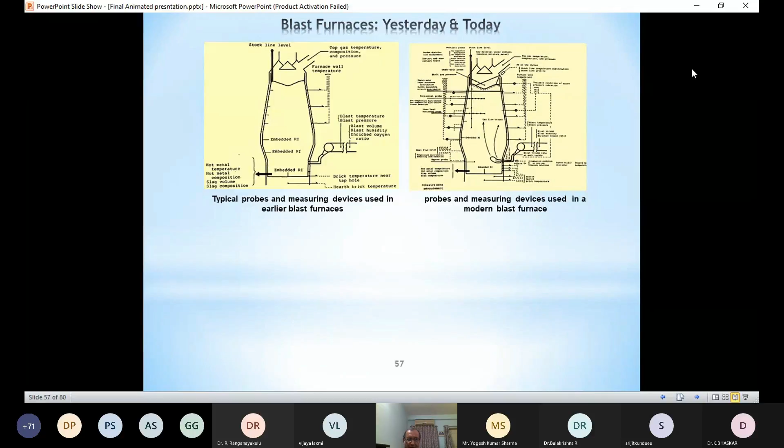Now this diagram, showing two pictures at the top, is not for you to really read - it is not readable. I have put them basically to show that the left hand side is a blast furnace of yesterday and the right one is what is today. You see in the right hand side blast furnace, there are so many projections inside - so many things inside the blast furnace. They are all there because we are putting a lot of sensors inside the blast furnace to know how it works.

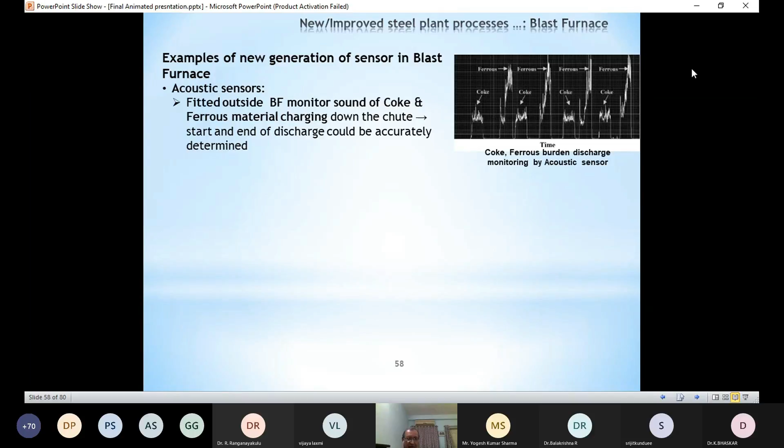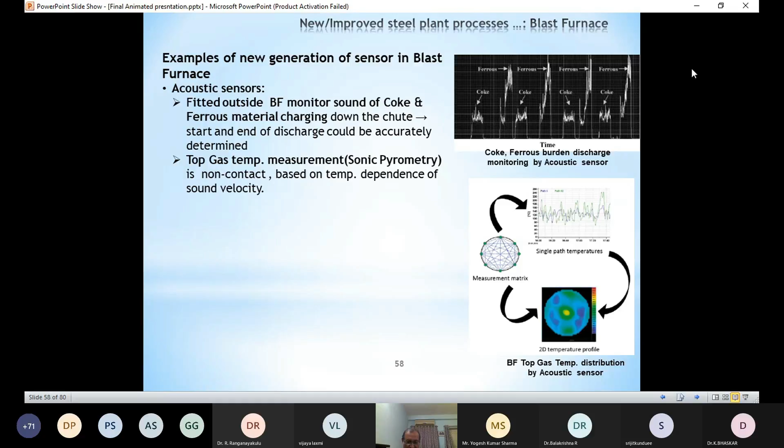So by signal analysis, using signal analytical techniques, we come out with the time and quantum of coke charge or ferrous charge being made. This is very valuable information, and now, in a very non-intrusive manner, we are able to know this. Top gas measurement is now done by sonic pyrometry, using the principle of temperature dependence of sound velocity. I never imagined such a thing was possible, but it is being done.

Now it is possible to measure and come out with the actual figure. So you can see the kind of instrumentation which is done to make a blast furnace operational.

In coke ovens, again, there are very new automation things that are utilized. Real-time coke pushing plan itself is now modeled, because coke oven operation is basically a complicated scheduling process. Batches of various ovens work together, they are charged together, and discharged a bit different from one another. So there is now a model for the pushing and charging plan.

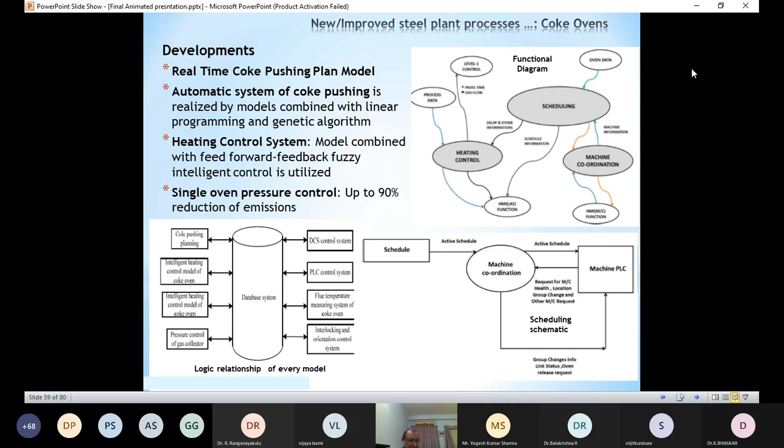Then there is heating control, which is again a batch process, now being controlled by even fuzzy logic. Then single oven pressure control, which was a dream maybe 20 years back, is now reality, which reduces 90% of emission in a coke oven, and coke oven emissions are serious.

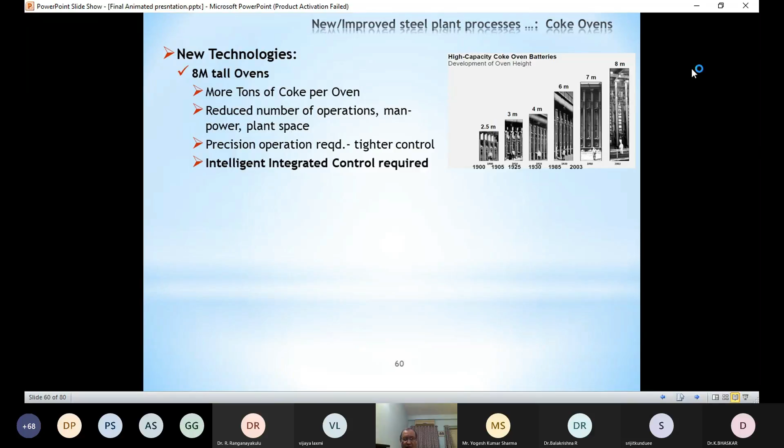The height of coke oven has increased to 8 meters, basically because we now have more automation which can control such huge coke ovens. Controlling the oven is really very difficult. Single chamber pressure control, as I mentioned, is now possible with many reliable instruments operating.

Through coke, we lose a lot of heat. Now that heat is being recovered using a coke dry quenching system, where nitrogen is used as a cooling agent, and this recovered heat is used to basically run a turbine. Then alignment of coke car and guide car is another very severe hazardous area, which can now be done very easily with automation.

In steelmaking is another area where tremendous development has taken place. Pre-treatment is the work where after a blast furnace we do pre-treatment and then send it for steelmaking. Now in pre-treatment we remove sulfur, silicon, phosphorus, etc. Vacuum furnaces are required there, and they cannot operate without automation.

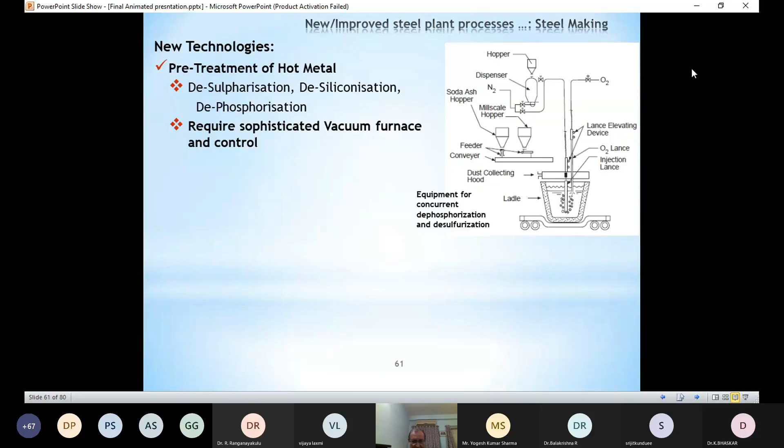Dynamic endpoint control in blast furnace, in basic oxygen furnace (BOF) combined with combined blowing and high speed blowing, is now a possibility just because automation can really operate there. Otherwise, it wouldn't have been possible. We get far better control on steel composition, we reduce tap to tap time, and we require, of course, complex online instruments and models.

Secondary refining technologies use a lot of facilities, AOD, VOD, etc., where extensive additional processing is done for refining of the steel to get proper properties, and they are possible only because automation is there.

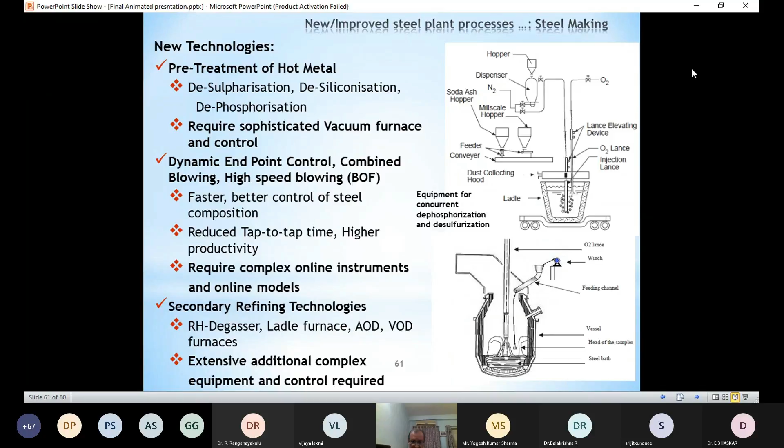Now let us see the new instruments in steelmaking. This is very interesting. We now have measurement of, in the steel ladles and processing ladles, the refractory lining inside. Now how much refractory has eroded during the process is important to know, otherwise there will be a leak through the body of the vessel.

So measurement of refractory lining wear is now done by laser very accurately. There is an image in the next slide. Off-gas temperature and composition is now done by Fourier transform infrared spectroscopy. Spectroscopy used to be an offline process; now it has become online. We use mid-infrared emission spectroscopy for off-gas temperature.

Then we have a microwave radar for slag emulsion measurement. Electrochemical sensors are used for FeO content. Radio wave interferometry is used for metal slag interface. There are many sensors. This is erosion of refractory lining identified by laser measurement equipment.

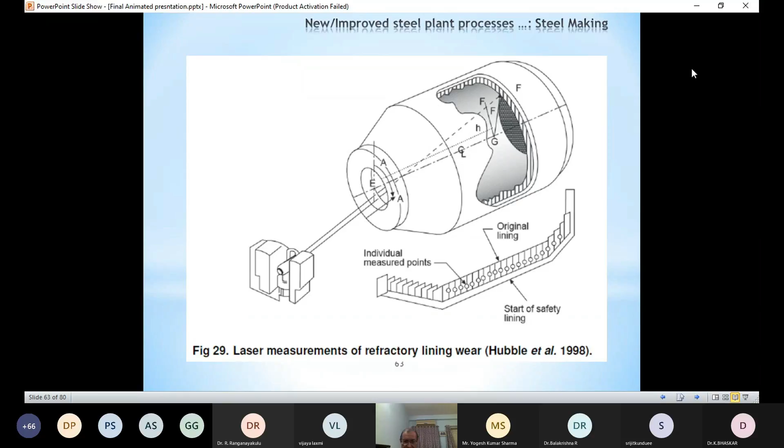This is basically in steelmaking. The technique of dynamic control was developed in the 80s, but then it was not precise because a lot of information was not available, and that's why control was not possible properly. Now we have full control over the dynamic blowing process of the basic oxygen furnace, because we now have a lot of information available online for all the parameters.

There are various models, I will not go into the names. There are mass energy balance models, twin support vector regression systems, charge models. Various companies have now got various model and simulation techniques for various steelmaking processes, and they are using them in many steel plants.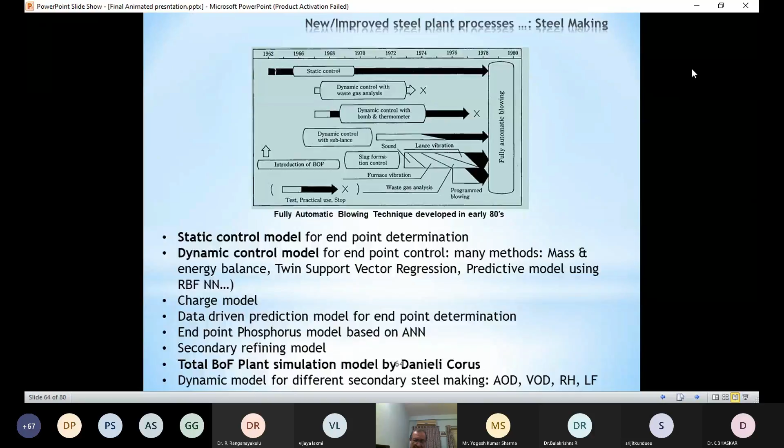In continuous casting, originally this process eliminated ingot rolling. That is one of the main advantages it had. Now this dramatic change has been brought about because of the introduction of casters for producing various shapes.

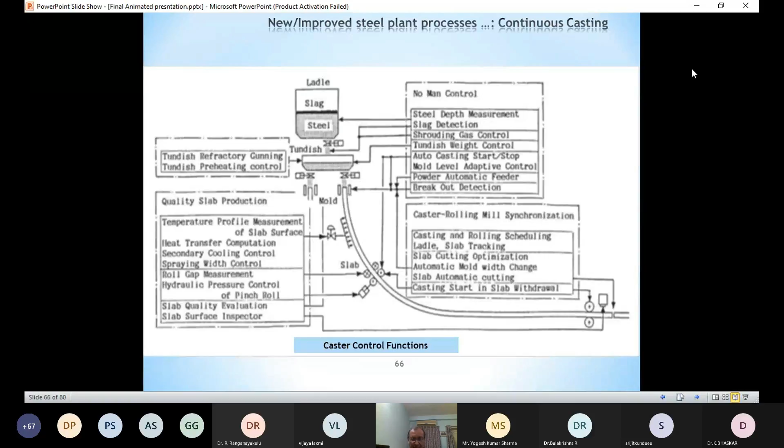Now, expert systems and other automation systems are regularly used here. I am not going to describe this in detail, but there are various measurement and control functions mentioned for a continuous casting machine, from tundish to mold to secondary cooling, then cutting. In fact, casting machine is a place where complete control can be done without much problem.

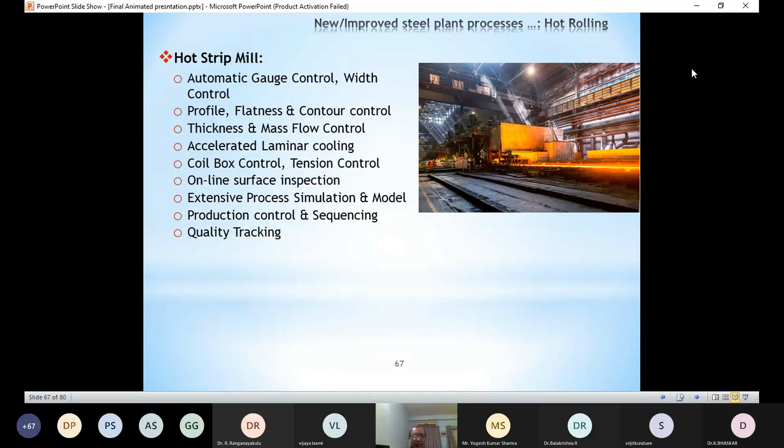Rolling is a process which is most amenable to modeling and control. There are many models and many controls required for hot strip rolling.

Cold rolling is traditionally more complicated than hot rolling in terms of control. The reason is that in hot rolling, finish is not that important, and surface properties are also not that important. But in cold rolling, the product goes finally to the customer, so you have to be very clear about the properties, surface quality, and it should be defect free, along with many other requirements. That's why models for cold rolling mills came up much earlier than for hot rolling mills, and now cold rolling is much more sophisticated in terms of automation and control.

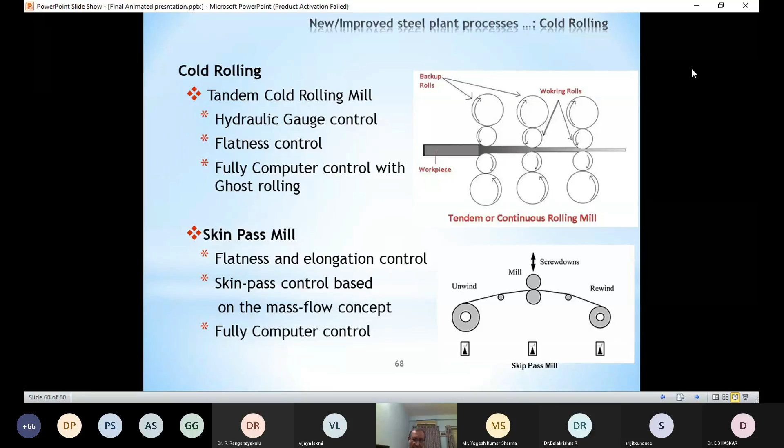Skin pass mill is the last stage of the cold rolling process. Let us now go into energy, environment and asset management in a steel plant.

Energy consumption in steel plants has reduced by about 50% on average all over the world in the last 40 years. So you can imagine the amount of improvement that has been done.

Actually, there are many shops in a steel plant, like coke oven, rolling mills, and blast furnace, where energy is consumed in a huge manner. All of them are now consuming much less energy. We are also recovering a lot of lost energy, like with CDQ technology and oven gas recovery. So many recovery systems have been introduced.

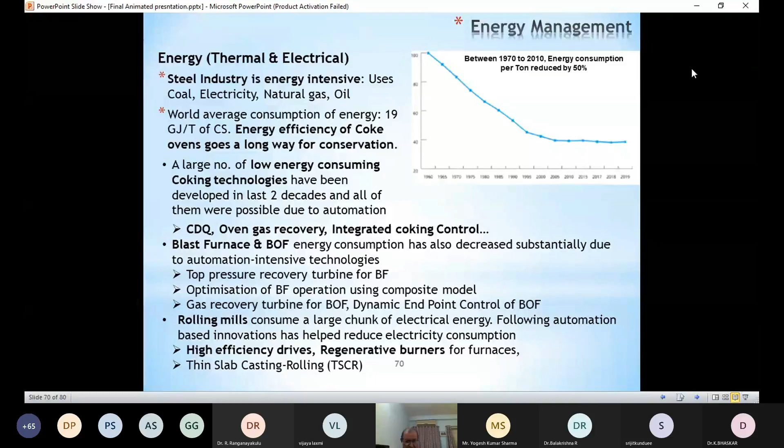Blast furnace and BOF energy consumption has also decreased substantially because of automation. Rolling mills are using high efficiency drives nowadays, and we are using regenerative burners for furnaces, which have reduced consumption.

Environment wise, steel plants are a problem because they produce a lot of greenhouse gases. Steel plants are responsible for 4 to 5% of global CO2 emissions, and 69% of the CO2 in a steel plant is produced by the blast furnace.

So what are the roles of automation in environment management in a steel plant? There are two: one is monitoring, transmission and analysis of offending emissions, and the other is helping with mitigation technologies.

In monitoring, we have advanced sensor technologies, so there is no technical limitation to monitor whatever we want. There are also a large number of tools available for analysis and correlation of data, which is possible nowadays with automation. So with vast online data, we can pinpoint the specific process condition that resulted in an emission. This is what automation is able to do today.

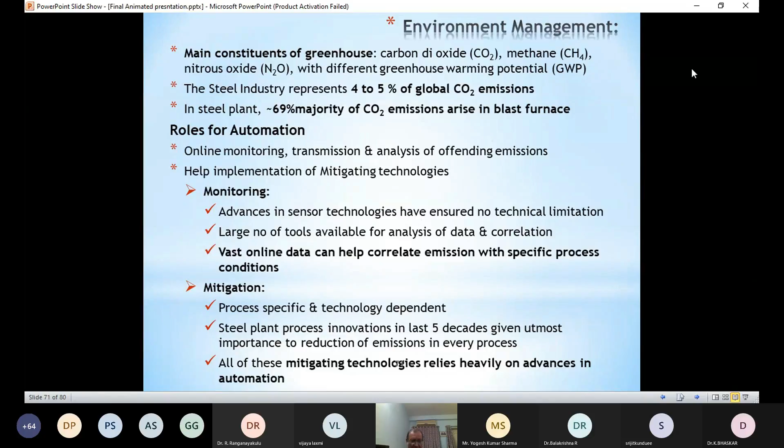And on the mitigation side, we know that reducing emission is a process specific and technology dependent task. Process innovation over the last five decades has given great importance to reducing emissions in every process, and automation is extensively used for these mitigating technologies.

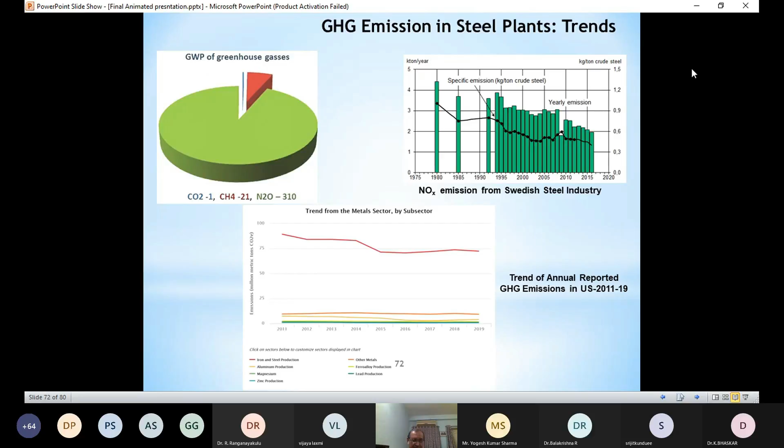These are some pictorials about greenhouse gas emissions and their percentages in various places, so I'm not really going through them.

Asset management. What is asset management? Physical asset management is a method of obtaining the best value from an asset for the cost involved. Basically, it means we have to do a life cycle analysis covering design, construction, installation, and operation, to understand how we can get the best out of an asset.

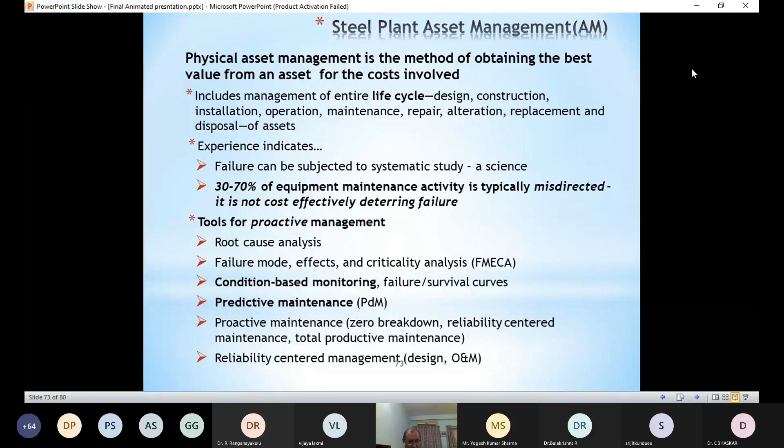Interestingly, experience indicates that 30 to 70% of the equipment maintenance activity we do is typically misdirected. It is not cost effective and it does not deter failures. This is where asset management comes into the picture. So what are the tools for doing better? There is root cause analysis, failure mode effect and criticality analysis, condition based monitoring, predictive maintenance, proactive maintenance, and reliability centered management. There are so many tools for that.

ABB is a world leader in asset management, physical asset management, and their asset management portfolio is handled by the automation division. So you can understand that automation has a big role to play in asset management. Asset management tools and strategies include condition-based maintenance management, remote diagnostic services, historical analysis of asset data, IT security, and health, safety, environment issues.

If you take a motor, when it starts operating, slowly you will find it start decaying. Vibration builds up, then in course of time there will be oil loss, then there will be noise, etc. So these asset management techniques can find out exactly at what time you have to intervene to ensure that the asset is properly utilized and properly maintained.

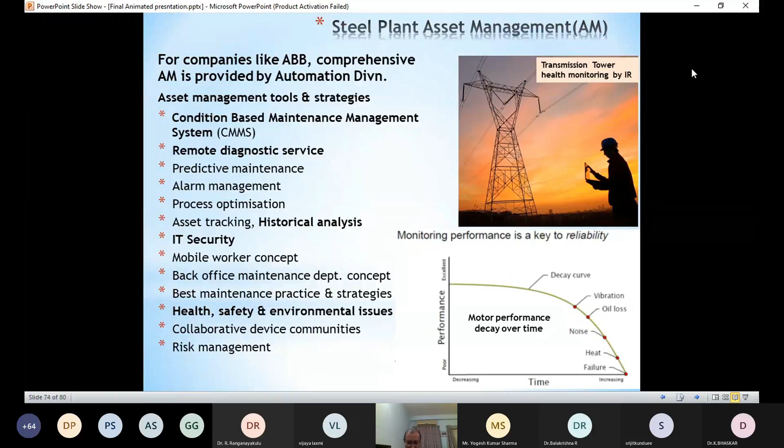Now, application of Industry 4.0 in steel is the last part. What are the trends? I'll give you some examples only.

POSCO is a South Korean plant. The South Korean organization has two plants, and one of them, Gwangyang Integrated Steel Plant, is considered to be the leader in Industry 4.0 implementation as of today. It is a smart factory connected by AI, IoT, and tons of data in the cloud that teach the system to work by themselves.

Posframe software platform is used to undertake this kind of activity in POSCO. The smart factory analyzes data, sends direction to control settings for an optimized operation. When sensors detect abnormal signals, operators can pinpoint locations for physical inspection.

The data from individual processes contribute to a digital genome for each plate that passes through the plant. What does this mean? For each plate the steel plant is producing, there is a record of which blast furnace, at what condition, when it produced, with what parameters. Steel making has been done under what conditions, rolling has been done under, casting has been done under what conditions. All data are tagged with this plate in terms of record.

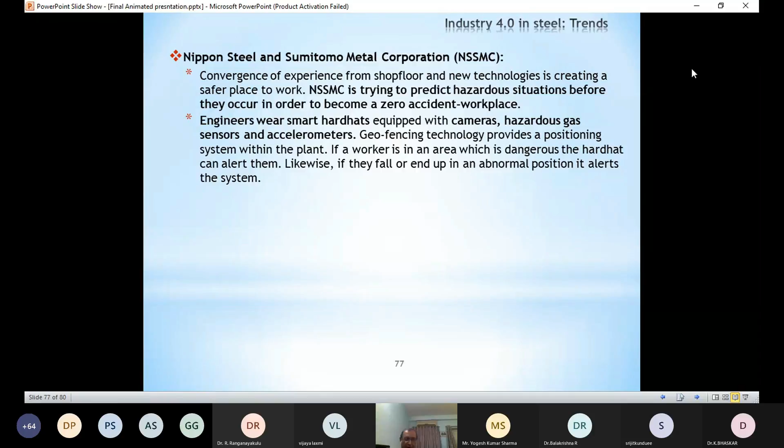The engineers wear a smart hardhat which has a camera, a hazardous gas sensor, and an accelerometer. This is connected via GPS. So any worker who enters a dangerous place will come to know at least from the signals. His location will be known to the control room, and the control room will also know the signal values and warn accordingly if he is not already warned. This is the type of work they are doing.

Then there are drones for autonomous monitoring of systems, where the drone looks after the maintenance aspect and monitors whether any abnormal activities are going on inside the plant. Not take care really, but it can see and then notify.

There is a project, Transparent Product Quality Supervision Industry 4.0, where the purpose is to build customer-supplier collaboration by being transparent about the details of processes that have taken place for a product for a customer.

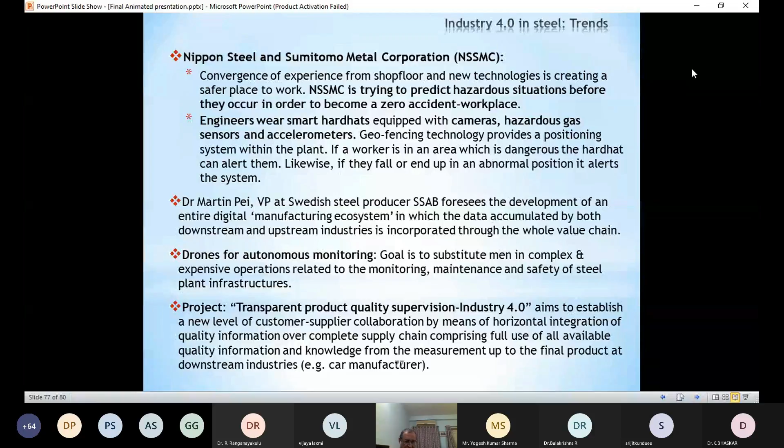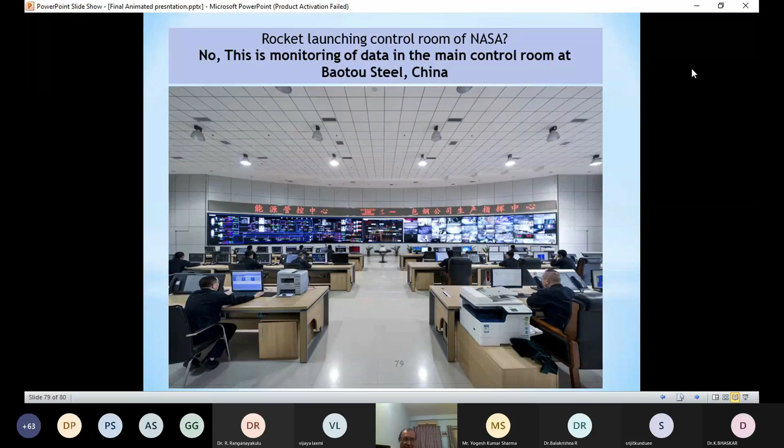And lastly, this control room looks like a rocket launching control room of NASA, isn't it? But then this is monitoring of data in the main control room at the Baotou Steel plant in China. See where the steel plants have come today.